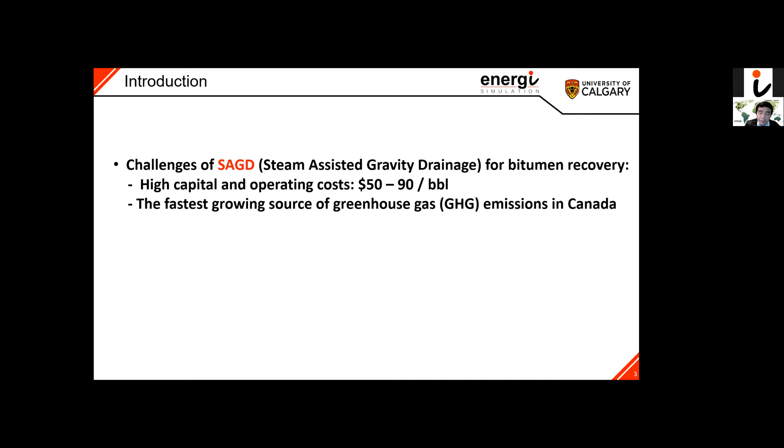The research objective for our current program is to develop a steam additive recovery process that reduces the cost of in situ bitumen production, and at the same time reduces the amount of greenhouse gas released per barrel of production. The additive, as some of you here heard me mention many times, could be solvent, chemical, NCG, non-condensable gas, or air or oxygen.

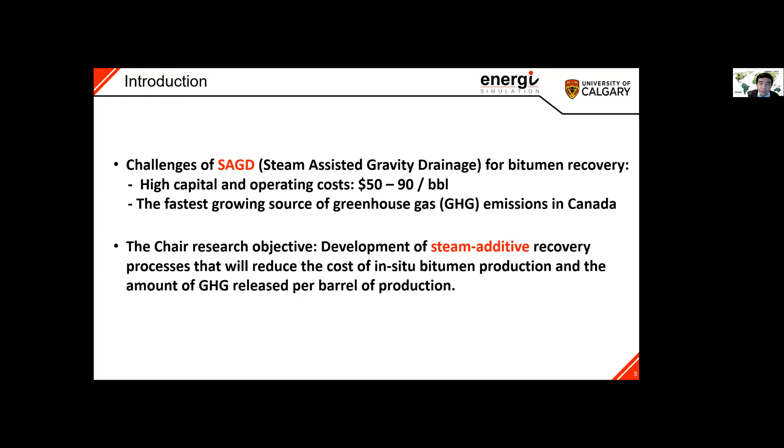We do have different groups working on different parts. Some of the team is working on chemical, some on air, and the additive could even be a catalyst, so some of the team is working on catalysts. And I would like to continue from last year, so I focus on the solvent. So this is the general introduction to my chair program, in particular for this project.

SAGD and CSS, cyclic steam stimulation, are usually used to recover heavy bitumen. Both SAGD and CSS are associated with high energy intensity, and we have to inject lots of steam to produce oil. For instance, 3 barrels of water, in terms of cold water equivalent steam, to produce 1 barrel of oil. That's the best one. Most of the time, you have 5, 6, 7, or even 10 barrels of water to produce 1 barrel of oil. So it's high energy intensity, and you also get a lot of CO2 emission.

Solvent injection, whether with steam or pure solvent injection, has been proposed and tested. But so far, we haven't got promising results. A lot of companies did pilot tests, but we didn't see success stories. The reason is solvent injection is a very slow process. Solvent injection involves molecular diffusion, which is much slower than the heat transfer that takes place in SAGD or CSS. So these are the problems.

The other problem is the solvent cost; the solvent is very expensive. You use very expensive solvent, a light hydrocarbon, to produce heavy oil. That is normally a very expensive process. Since it is costly, we want to recover some of the solvent and recycle it. So the challenge is how to recover some of the solvent.

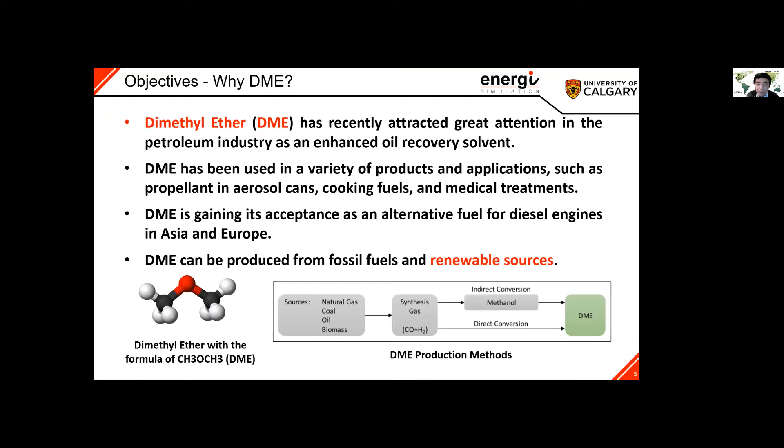In general, DME is produced in two steps, either direct conversion or indirect conversion. So from the fossil fuels or biomass, we produce syngas, and from syngas, we produce DME. So this is how it's manufactured.

What we're working on is to study the phase behavior of the DME, bitumen-water mixture, identify the key mechanisms for the rate improvement for the oil recovery, investigate the advantages of DME and compare DME with other solvents, and also study the DME retention rate and the recovery rate. This will support the pilot, and in the future, the commercial pilot test.

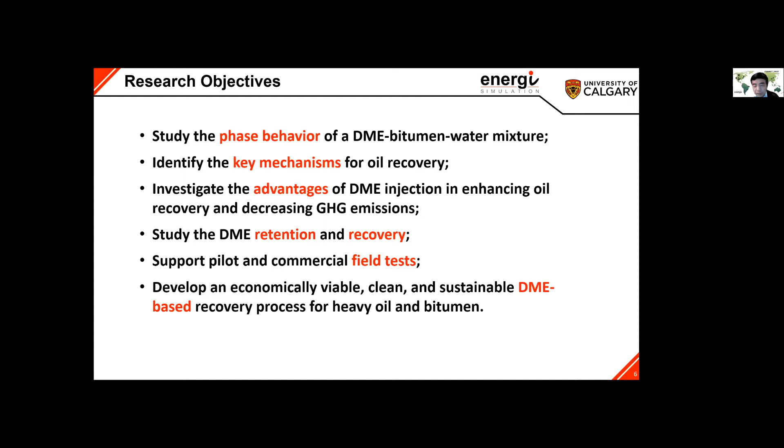Eventually, we want to develop an economical, viable, clean, sustainable DME-based recovery process for heavy oil and bitumen. Of course, if it could be used for heavy oil and bitumen, it will also be used for light oil. And this is our workflow. Currently, we are following this workflow to carry out our research.

From the lab experiments, we measure some of the data, the phase behavior experiment, and also the larger scale displacement. Then we will develop either empirical or analytical mixing rules or equations of state to study the phase behavior for DME-oil, DME-water, and DME-oil-water. That's three phases.

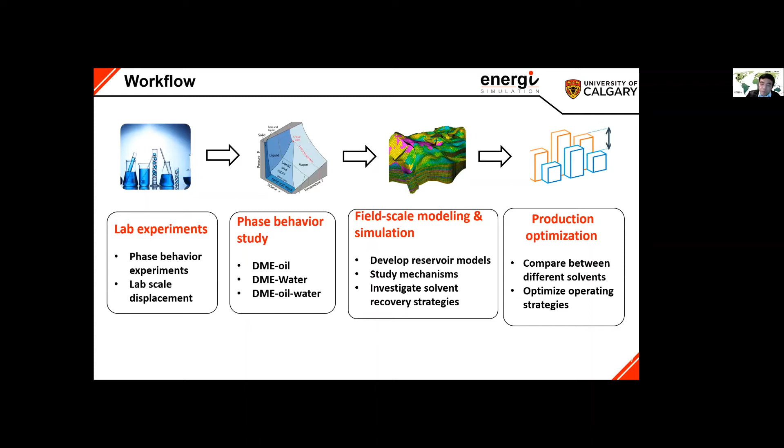Once we study the phase behavior, we perform the field scale modeling simulation. We develop the models, study mechanisms, and investigate the solvent recovery process. Eventually, we want to optimize all the parameters to optimize the production. So this is the workflow we're following. And I'm going to present some of the results we got so far.

The difference between DME and the alkane components is this. At the same operating pressure, the saturation temperature of DME is lower than that of propane and butane. So this means DME requires less heat, less steam. Also, DME's diffusion coefficient in oil is 10 or 100 times higher than those of propane and butane, which means we can have fast diffusion.

What's more, DME is also soluble in water. This is a really good property. So first, we have fast diffusion, which means DME produces oil faster. Second, we could use the water to recycle DME. So this is another very good advantage.

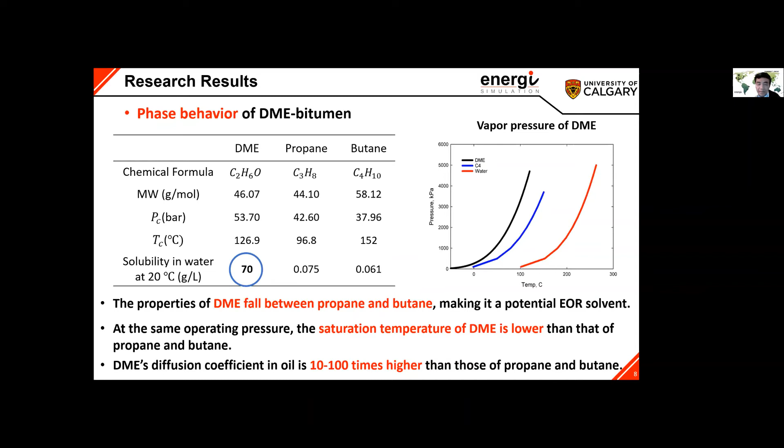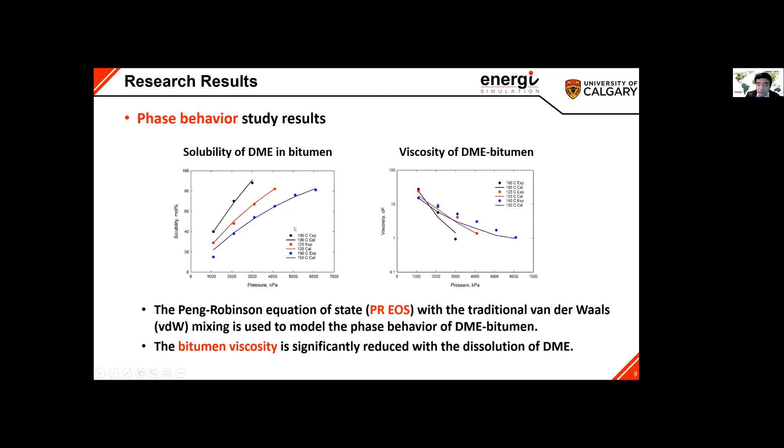The dots are the laboratory experiments. As I said, in the workflow, we use the laboratory data, and we use the phase behavior, the equation of state, to match the laboratory data. They match very well, as you can see for DME and bitumen.

For water, this is a different story. Because DME is slightly polar, DME is soluble in water. The traditional Peng-Robinson equation with the traditional mixing rule cannot accurately model DME and water. Our team developed an analytical formula to study the molecular interaction between DME and water. This one works even for the asymmetric system, which means when you have one phase dominate.

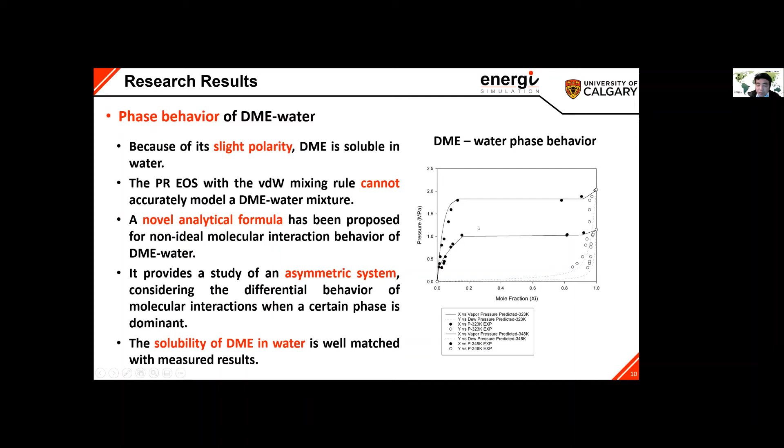And once we understand the phase behavior, as I mentioned from the workflow, we're going to go on to do the reservoir modeling, do the simulations. And we did a lot of simulations. This is just one of the examples. For instance, this is the reservoir. We use two half, which means we have half well pairs. We only simulate half of them because this is symmetric.

And the model dimensions, and this is the grid size, is very fine, only 0.2 meters. And this is the injector constraint, and this is the producer constraint. We use this well configuration. So this is the injector, this is the producer. Here you inject DME, and here you produce oil and all the other phases or components.

The reason for using the SAGD well configuration is because SAGD well pairs have been used a lot. Probably 80% of the bitumen production comes from SAGD. And of course, you could use different ones, for instance, cyclic stimulation or even solvent flooding. So we use this one as one example.

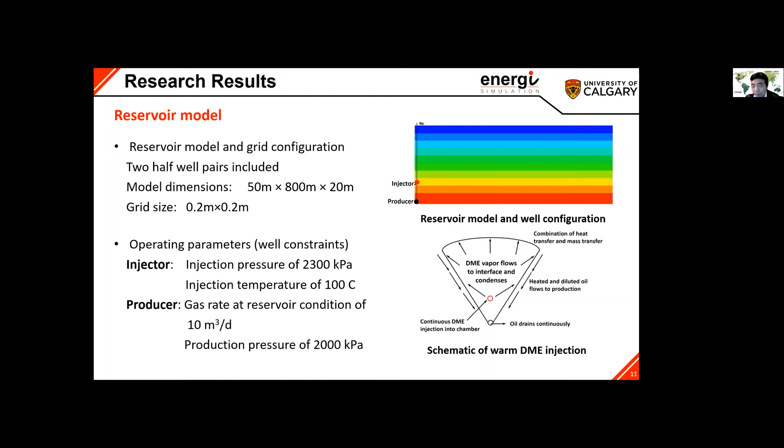And here we use warm DME. The reason is when you have a cold formation in Alberta, DME is a liquid. And when it's warm, for instance, 80 degrees, DME is a vapor. And here are some of the simulation results. This is the warm DME results.

So again, this is the chamber. And remember, for those who studied SAGD, you have a temperature chamber. And here the chamber is the DME chamber, the solvent chamber. You see, this is one of the chambers here. So here, this is the temperature profile.

And as I mentioned, one of the advantages of DME is it's soluble in oil and also soluble in water. So this is the DME mole fraction in oil and DME mole fraction in water. And in general, DME is more soluble in oil than in water. So the chamber development in the warm injection is similar to that in SAGD. And again, this is the combination of heat and mass transfer.

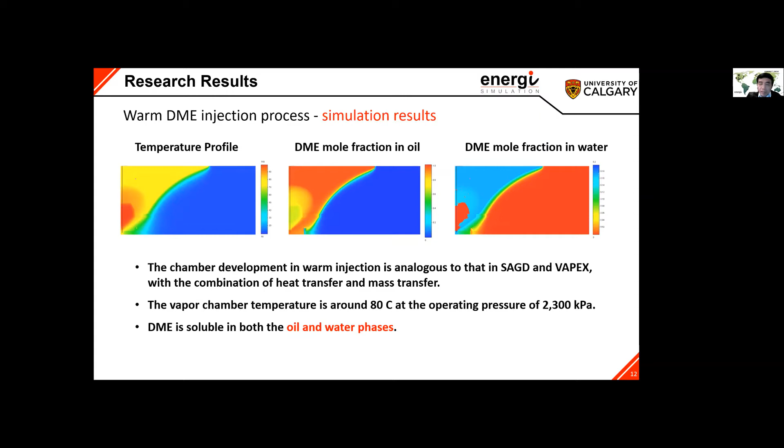And the vapor chamber temperature is around the injection at 80 degrees at this operating pressure. And as I mentioned a moment ago, DME is soluble in both oil and water phases. So when we do the simulation, we can find the temperature profile, and also the mole fractions in the oil phase, in the gas phase, even in the water phase.

So this is the cumulative oil production. The black one is DME, and the blue one is SAGD. And we compare with SAGD, with butane, and with DME. As I mentioned, the reason why solvent injection has not achieved a successful story is that solvent injection is a very slow process because molecular diffusion is much, much slower than heat transfer.

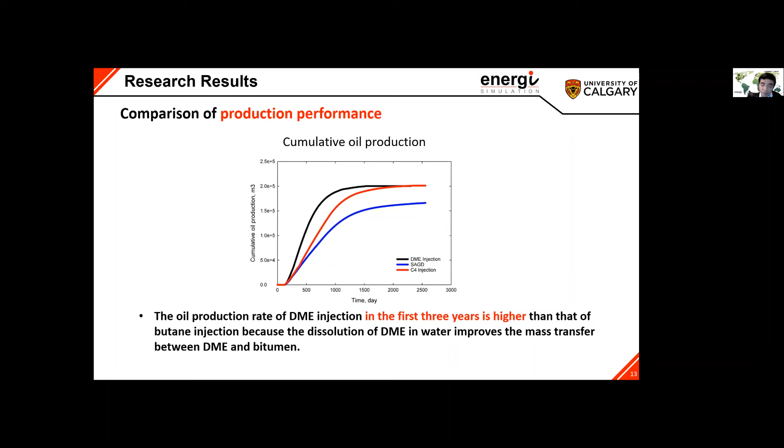And as also mentioned, because of the solubility of DME in both oil and water, you can see in the first 3 years here, the oil production is much higher than the other solvent and even than the SAGD process. So this is a really good, very promising feature. You have fast production, and a company will like this. You're making profit right away. And the other one is, as I mentioned, it saves time because of the lower saturation pressure.

So this is the cumulative energy oil ratio. This one is SAGD, this one is butane, and this one is the warm DME. So from what we studied here, in the real situation you may have less promising results, but still DME saves you a lot of energy.

For this particular example, the energy oil ratio in the DME injection is 75% less than that in SAGD, and 48% less than that in the butane injection. Again, this is because of the low operating temperature. So this is a really huge advantage of DME compared to other solvents.

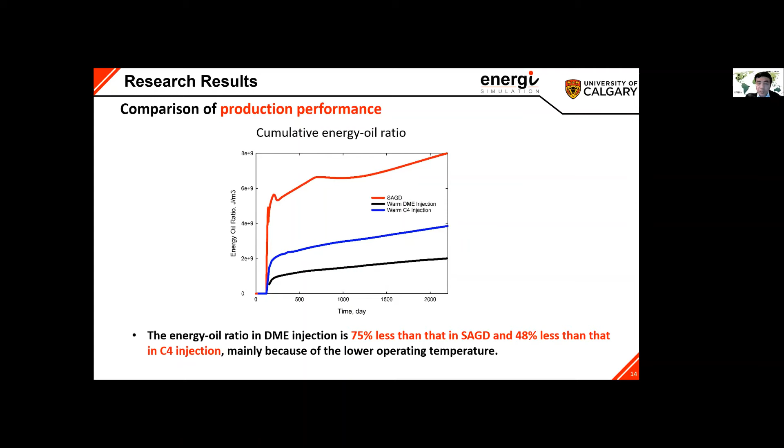And again, when you reduce the energy intensity, you reduce everything, the cost and the emission, the greenhouse or CO2 emission. And also the solvent recovery, that's the major challenge the industry faces. How could you recover the solvent you injected? Because as I mentioned, solvent is very expensive, and to make a profit at the current oil price is not that easy. But if you could recover some or most of them, then you can reduce the cost of the solvent.

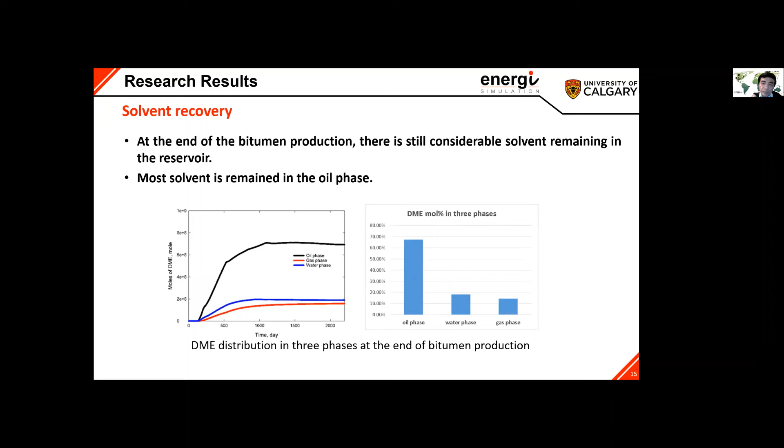Again, when you inject the butane or the DME, most of the solvent is in oil. In the DME case, the DME is soluble in oil, so most of it stays in oil, but some of it is also in water, and a small percent even in the gas phase. So we calculated the solvent mole fraction in each of the three phases underground. When you inject solvent, most solvent is retained in the oil phase. At the end of bitumen or oil production, you still have some of the DME remaining underground, and how to recover them?

And remember, during SAGD or some of the recovery processes, industry does use NCG to maintain the pressure. In the wind-down process, you inject NCG to maintain the pressure to still produce the bitumen, heavy oil, or oil. If you use the NCG to maintain the pressure, fortunately, this is a really good story. Using this process, you will probably recover most of the DME you inject. This is a really good advantage.

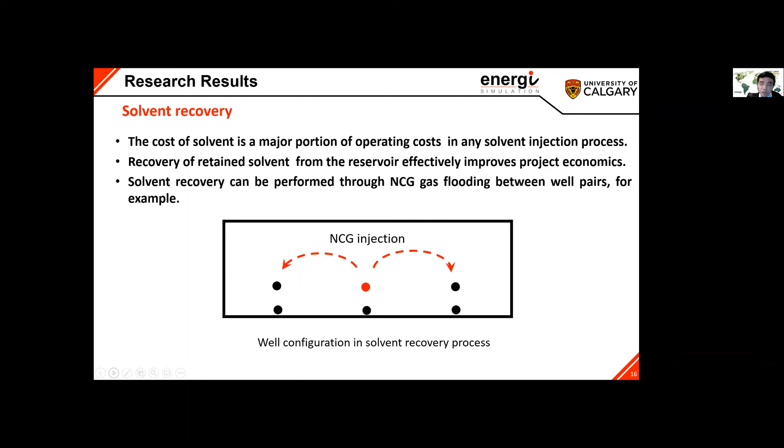The solvent recovery mechanism is the following. You depressurize the solvent vapor and maintain the chamber pressure, and recover the liquid solvent trapped in the irreducible liquid saturation. For instance, this is the vapor partial pressure, this is the chamber pressure, and this is the mole fraction. You keep this one fixed, so this one is reduced, and then we reduce this one. Using these mechanisms, you are able to reduce the mole fraction in the vapor and in the liquid.

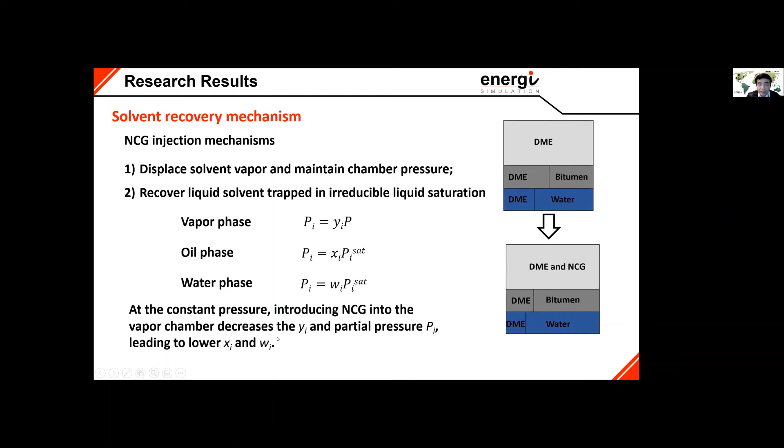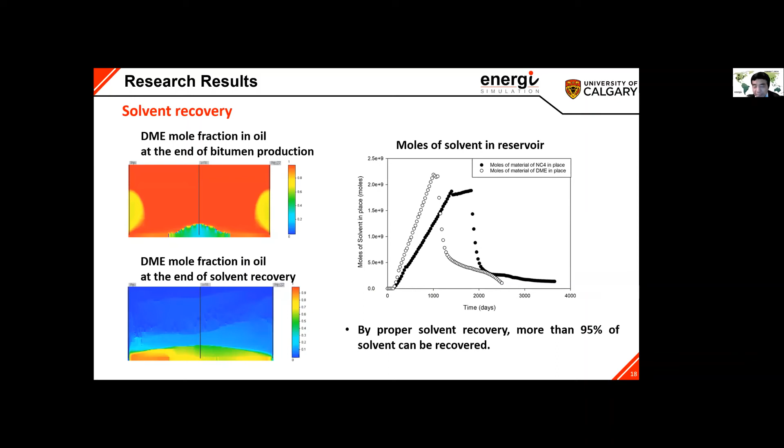Of course, this is our pure study to see how much DME you could recover, and we have to do a lot of pilots and studies. But the theoretical study gave you some guidelines and indications, using single wells, single well pairs, two pairs, three pairs, on how much you could recover. In a real situation, if you could recover 75%, I believe you could make money.

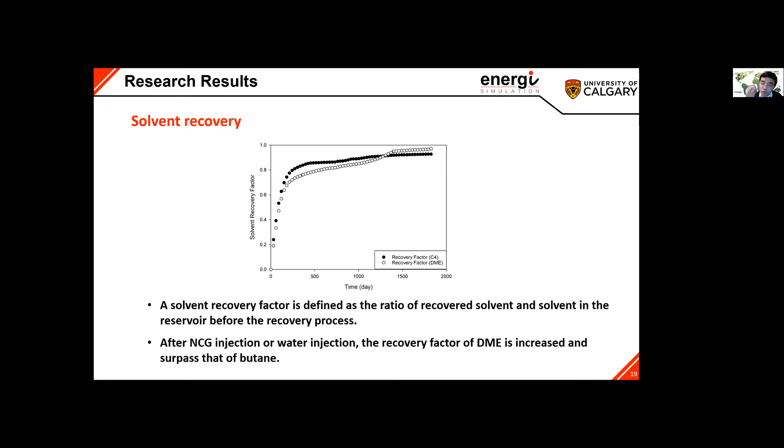This is a comparison of the recovery between the DME and the butane. At the end of the oil production, this is the butane and this is the DME, and after you inject NCG, you recover more DME than butane. NCG is one of the examples of the solvent recovery process; sometimes you may inject water to maintain the pressure. As I mentioned, DME is soluble in water, so the water will transport the DME out from underground.

So my conclusion is DME is evaluated as a promising solvent for heavy oil and bitumen production. A novel workflow is developed to predict phase behavior between the DME and the water. We also developed the lab workflow, which will guide you from lab experiments, phase behavior, modeling, to production optimization.

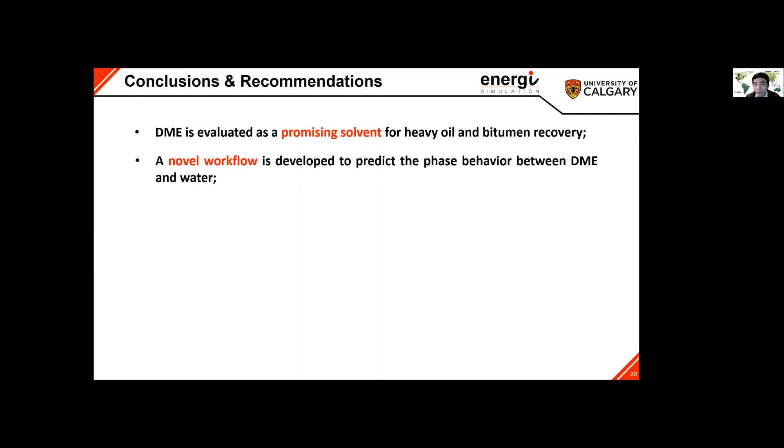DME injection is able to accelerate bitumen production compared with other solvent injection, because, as I mentioned many times, the solubility in water improves the mass transfer between the bitumen and the DME. A lower energy-oil ratio and less heat loss in warm DME injection indicate another great advantage of DME, through a proper solvent recovery strategy.

So at the end of the day, you say, I still have lots of solvent underground, and I don't want to buy more, I want to recover them. You could probably use some cheap recovery processes. Water is cheap, just use water, for instance, and you can recover most of the DME.

I didn't present the economic analysis; our group is still working on it, trying to evaluate the economic indices from the manufacture of DME compared with other solvents, and also the injection and retention rates, recovery rates, oil price, and DME price, and combine all the indices to see how DME could beat the other ones in a real situation. Once we finish the economic analysis, we'll tell you another story.

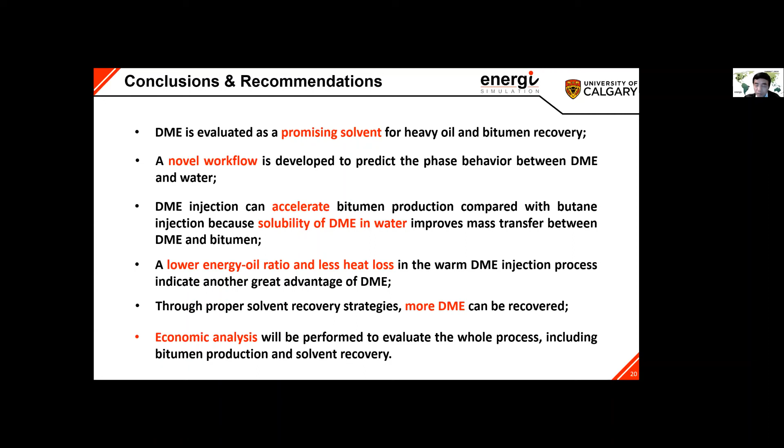As I mentioned, we did this study, and how could we help the companies to do some of the pilot? Alberta has large oil sands, and we do need the emerging recovery process. And this is already focused on the emerging recovery process. Hopefully, if somebody is interested in this DME injection process, we could work together to study more or to carry out some pilot tests.

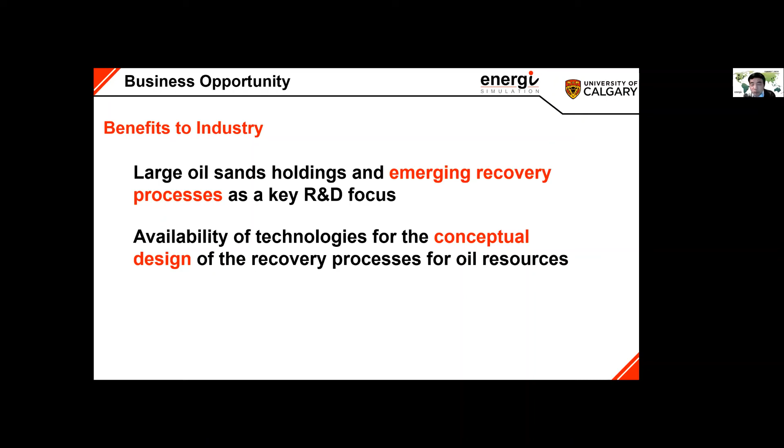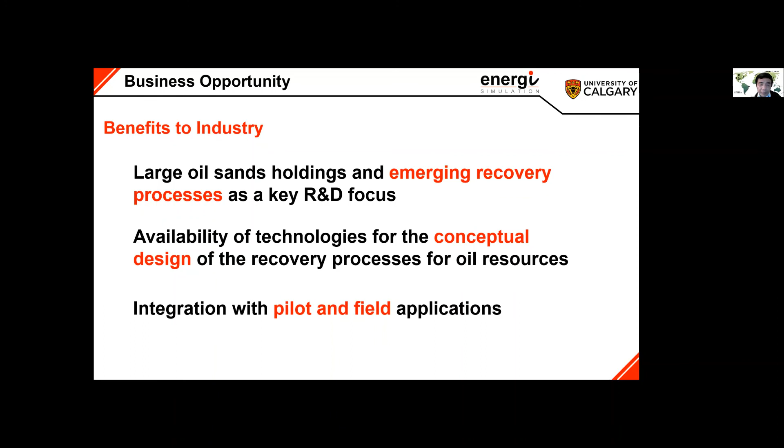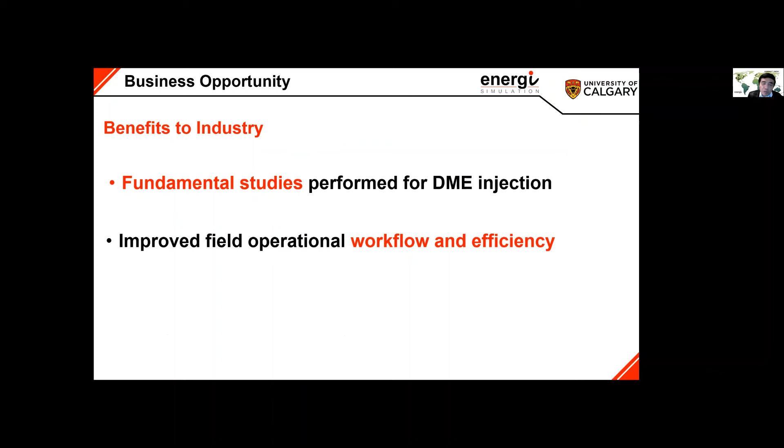And also the ability to work on the conceptual design. Again, when you have an idea, how to make the idea work, if the idea really works, how to improve the idea, and what will make the idea work the best, this is what we're working on. And we integrate the studies with the pilot and the field applications. So far, we did the fundamental study for the DME injection, and we improved the workflow and also its efficiency. And at the end of the day, if you haven't started this one and want to borrow some of our studies, this is going to save you tons of resources.

Dr. Chen, you need to speed up. Okay, I'm going to finish.

Thanks for reminding. The benefits, again, are mainly minimum environmental impact, while at the same time trying to increase oil recovery. And also we do have trained people in this area, so that could help you. And at the end of the day, I think this will help the Canadian economy. Trust me, I think we have a very promising recovery process. What you've got to take away from here: we're studying a particular solvent, and this particular solvent I think is very promising.